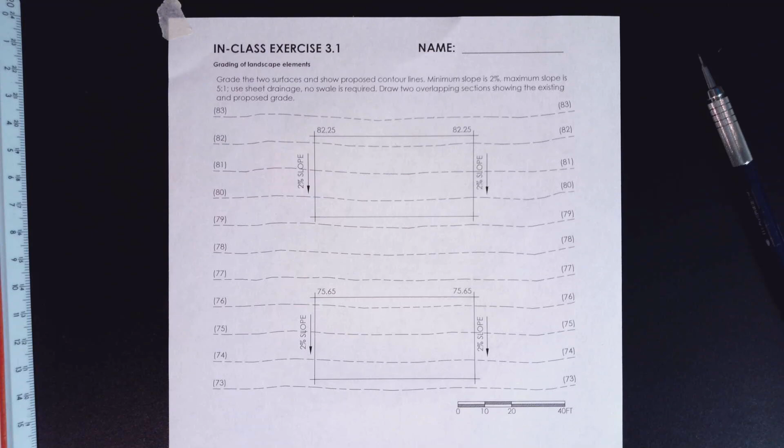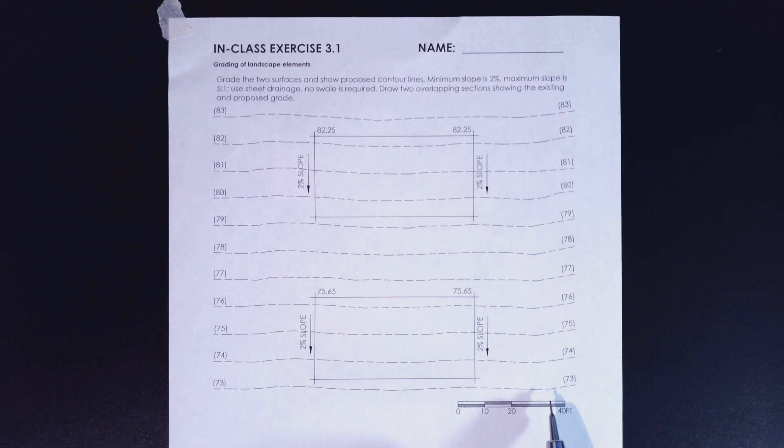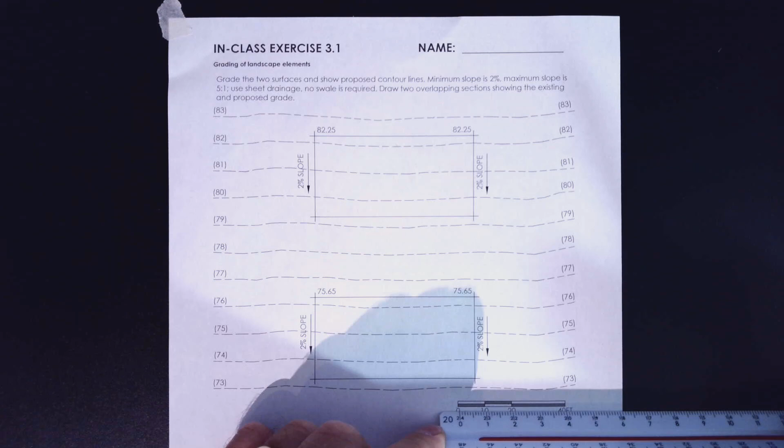This is in-class exercise 3.1. We're going to grade this. Your parameters here, it's 20 scale. So that means this is 1 inch from there to there. If you lay your scale on there, you can see the 1 is 10 feet, 2 is 20 feet, 30 feet, and 40 feet. So each one of these small ticks on your 20 scale represents a foot.

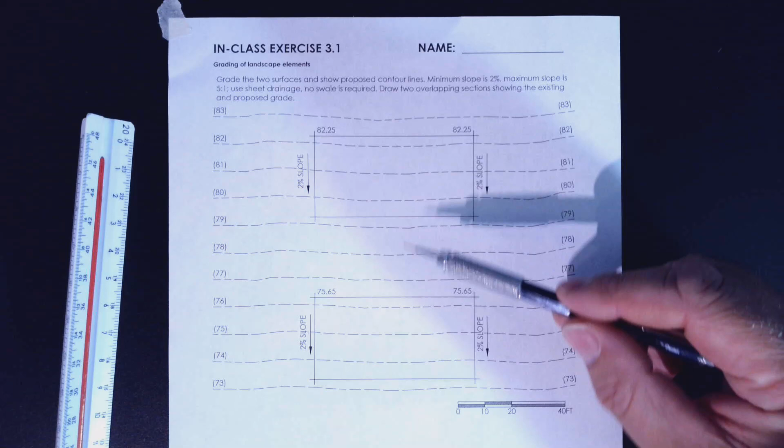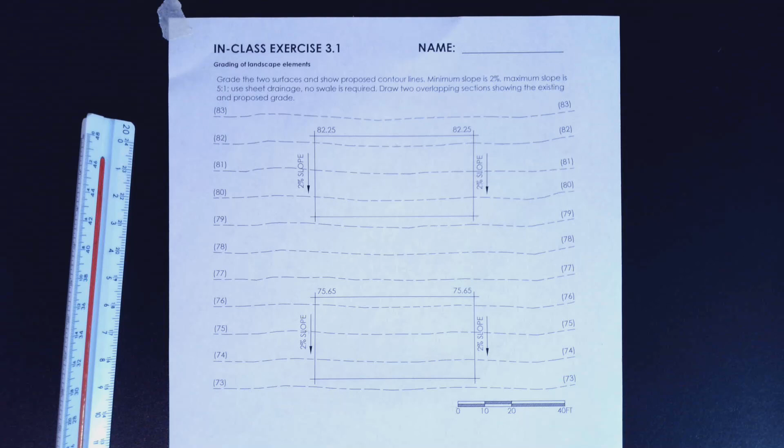The slopes for the pad are 2%, and the slopes for the contours in between, the spacing 5:1 max, which is 20% slope, right? Because 5:1, 1 divided by 5 equals 20%, or 0.2. Either way you look at it. So to get started, first thing we have to do is locate our corners on these pads, and they've given us the top of each pad. So this one is 82.25 at the top, sloping down at 2%.

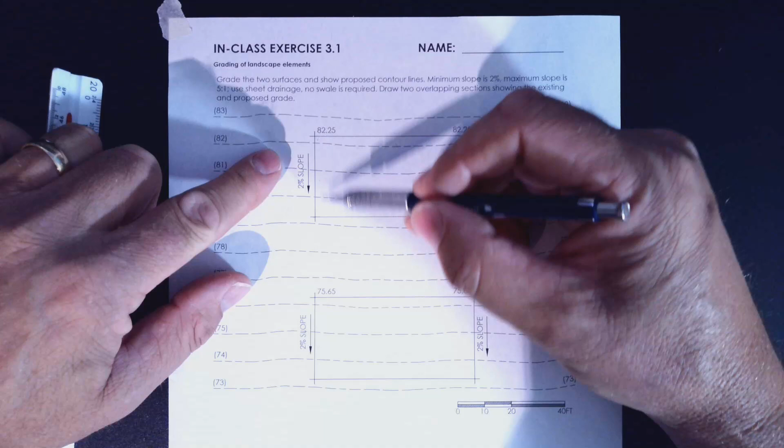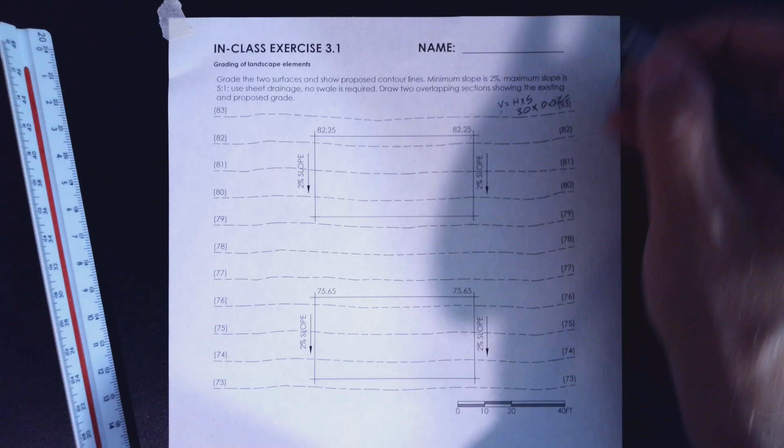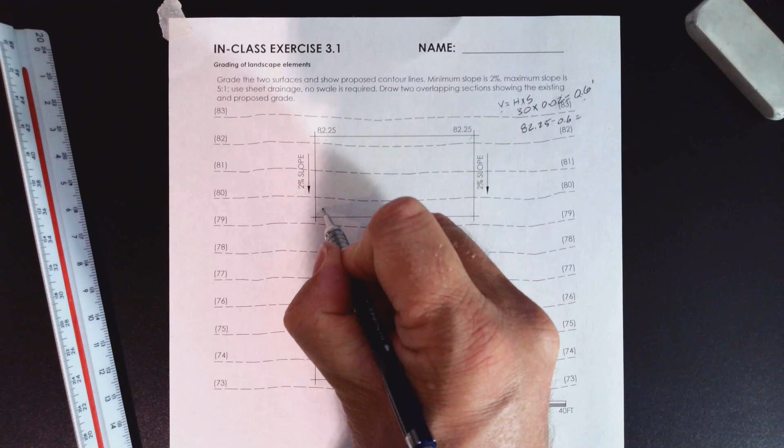If you scale it off, we see that this pad is 30 feet. So we don't know what the vertical is, and we know that vertical equals horizontal times slope, right? Horizontal, we just said it's 30 feet from there to there. So 30 feet times 2%, which is 0.02, equals 0.6 feet. So from here to here it drops 0.6 feet, so we subtract 0.6 from 82.25. 82.25 minus 0.6 equals 81.65. So your corners on this pad are 81.65 and 81.65.

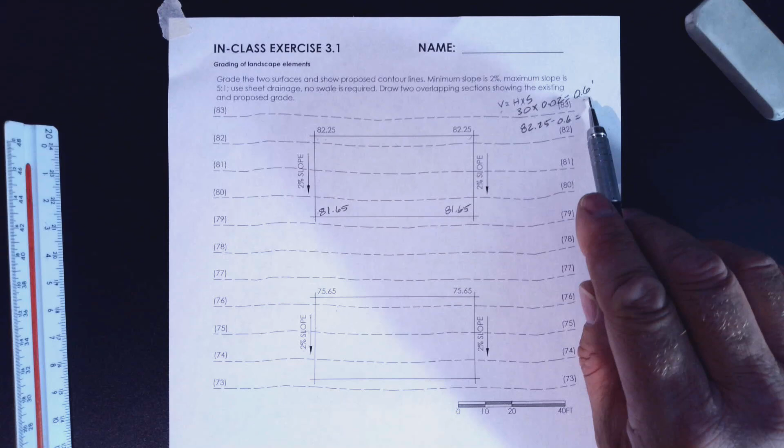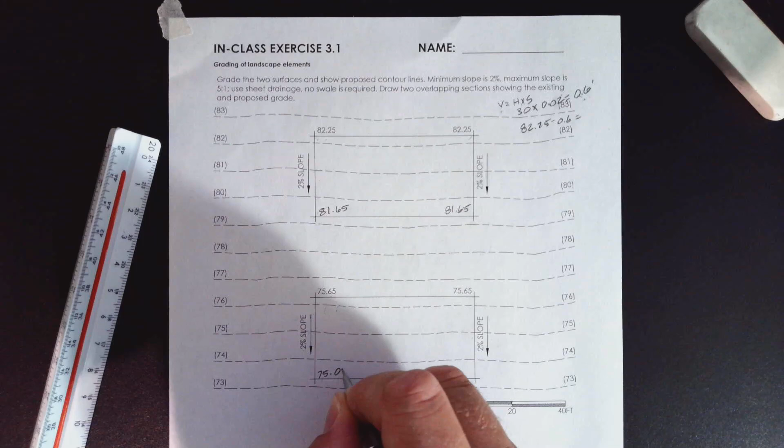All right. Now we got to do the same thing down here. This pad it's 30 feet as well, and at 2%, so you know that it's going to be the same. 30 feet times 2% is 0.6, so it's going to drop 0.6 from here down to here. So they make that easy. So subtract 0.6 from 75.65, and you get 75.05. Okay, so now we've graded out the corners. We know what the elevations of the pads are. So now we've got to do the contours in between the pads as well as on the pad. So let's start at the top and just work our way down.

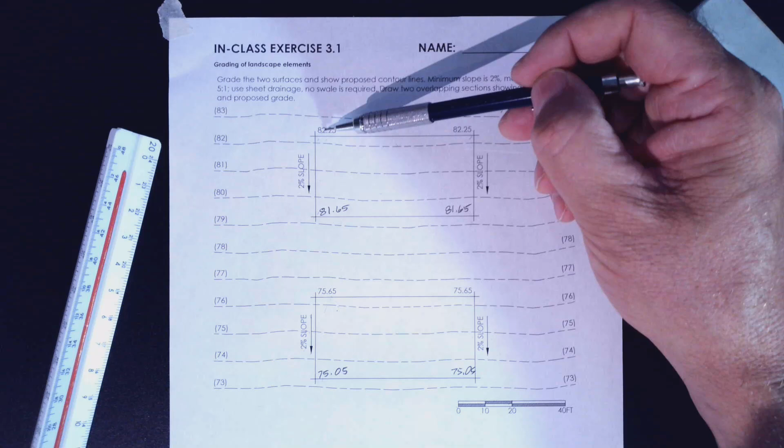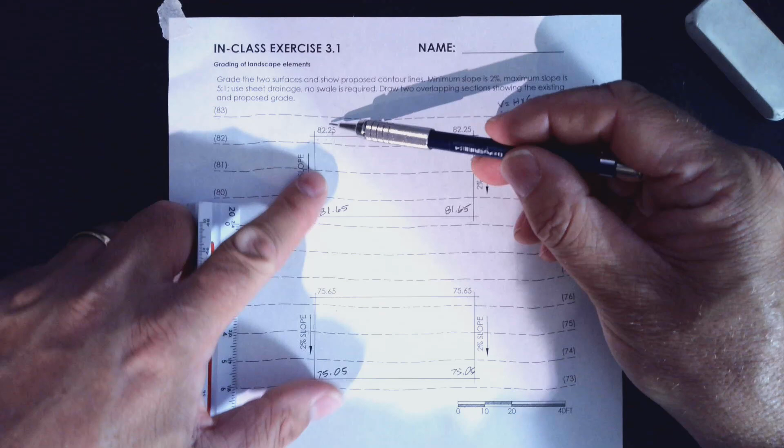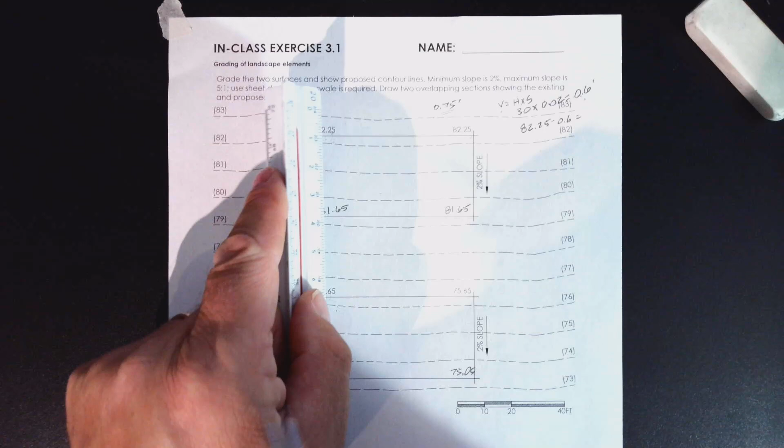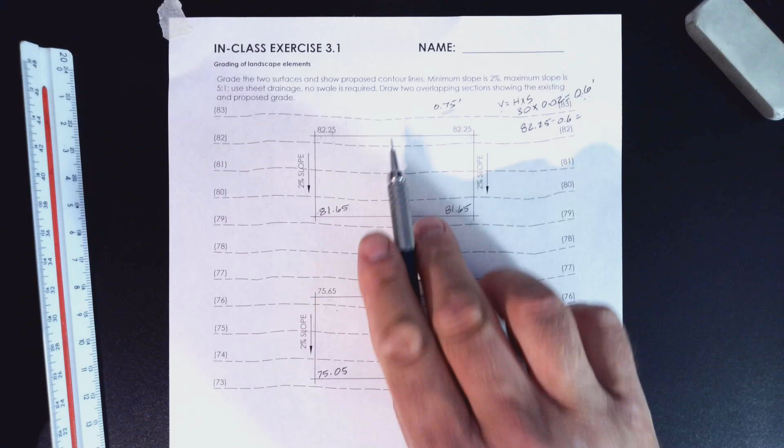So this is 82.25, and it's going uphill, right? 83, 82, 81. It's going downhill this way. Downhill, these arrows point downhill. 82.25, we've got to go to contour 83. So 83 feet minus 82.25 is 0.75 feet, right? So 83 is 0.75 feet away from 82.25 vertically. Well, this is less than a foot, but your separation is 5:1. Contour 83 is almost 6 feet away, so it's already at least 5 feet away. So we don't have to do anything. We're already meeting grade there, so that contour is fine because it's more than 5 feet away.

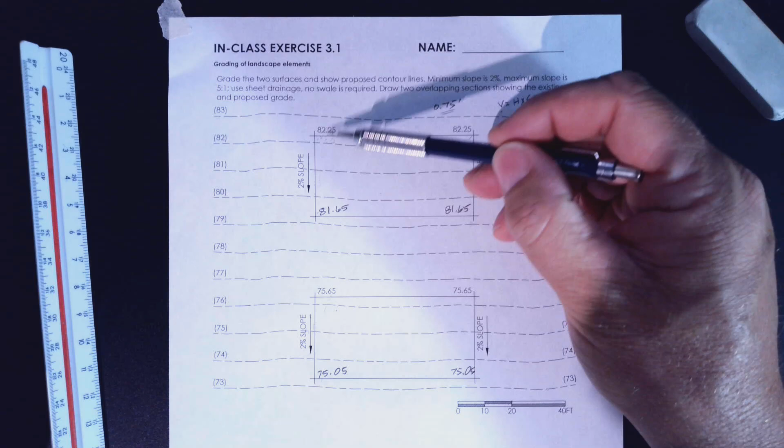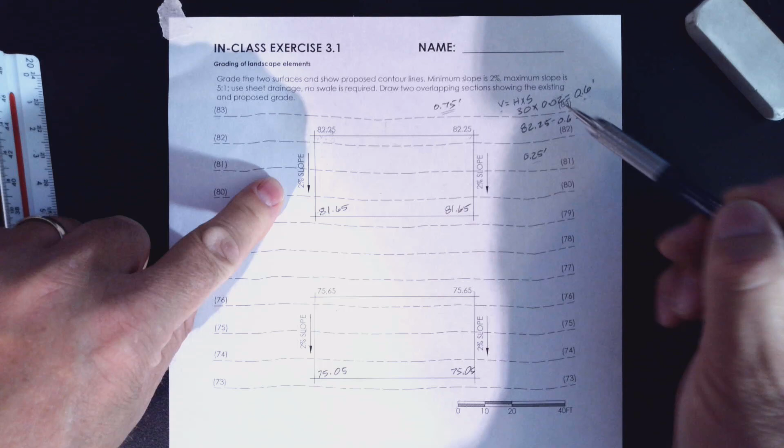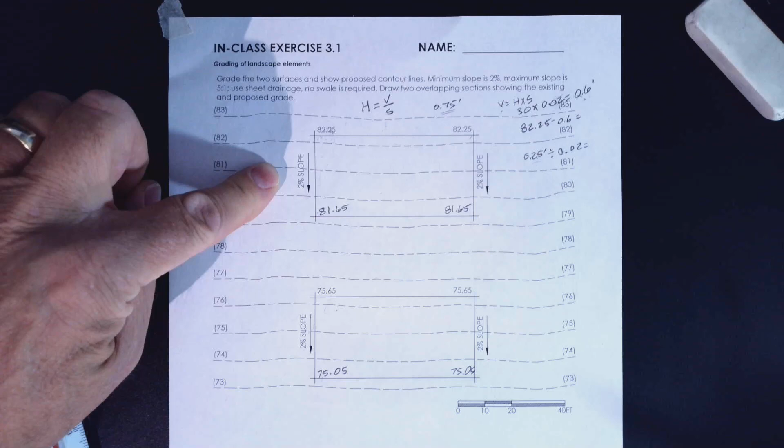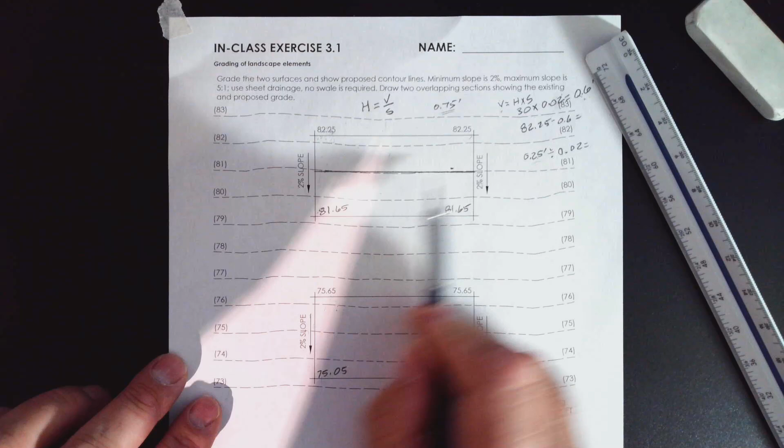Now we got to locate going this way, contour 82 or 81, right? That's the next contour down. Sorry, 82 is the next contour down. 82.25, we got to drop to contour 82. Contour 82 is 0.25 feet away vertically, right? If we subtract 0.25 from that, we get 82. We don't know horizontally where it is, but we know the slope. Horizontal equals vertical divided by slope, right? So if vertical is 0.25 and we divide that by the slope, 0.02, because that's the same as 2%, we get 0.25 divided by 0.02, 12.5 feet. So we just measure off of this line 12.5 feet and do it over here just so you can draw a straight line, 12.5 feet. And it should be horizontal to this line because it's a flat pad, so your intent is to make that horizontal. This line, this line, this line should all be parallel. So this is contour 82.

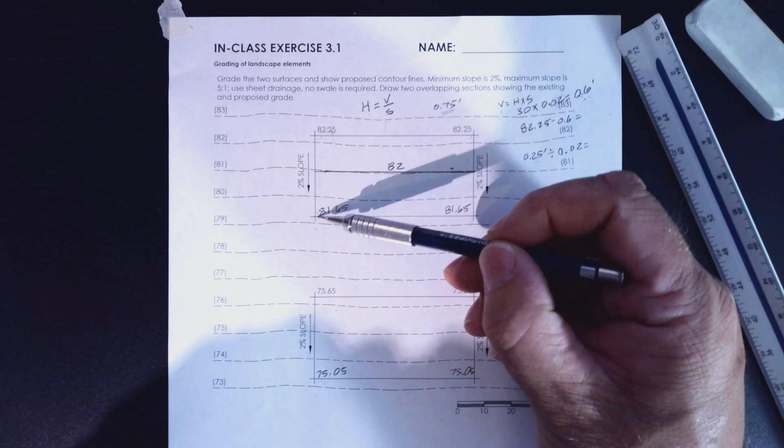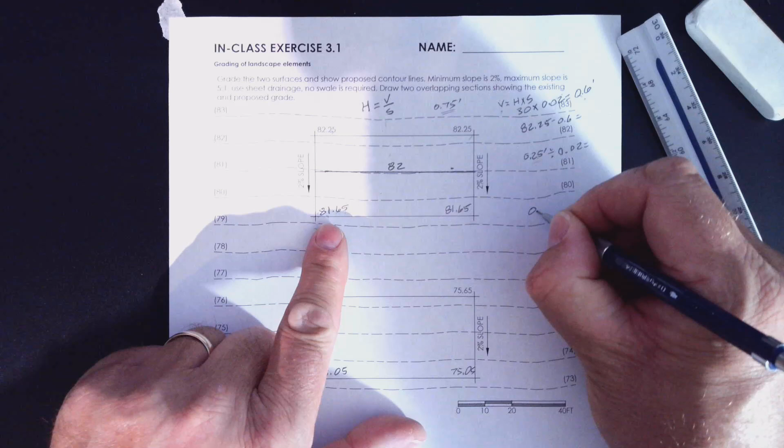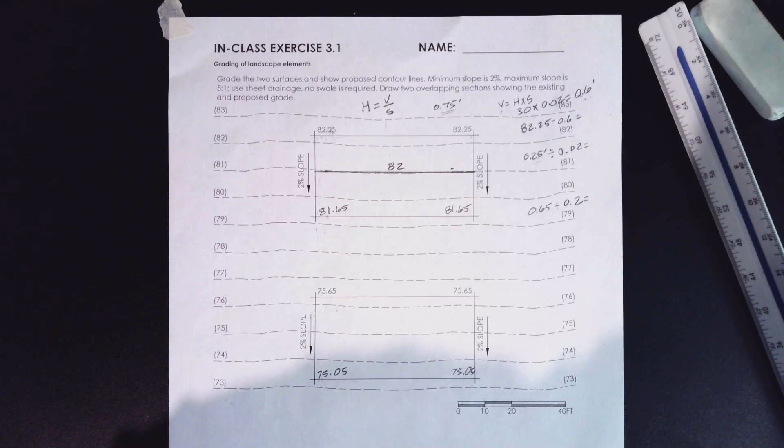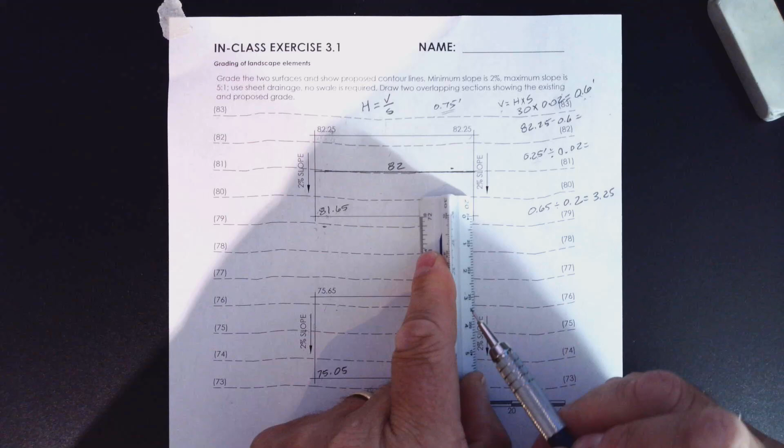Alright? Now, this is 81.65, so 81 is not on this pad anymore. Right? It's 0.65 feet vertically away. So we don't know how far horizontally it is away because if it was a foot, we'd need to drop 5 feet away. But this is 0.65. Right? 81.65 minus 0.65 gives you 81. So our vertical is 0.65 feet. We don't know the horizontal. Do we know the slope? 5 to 1, it's a 20% slope, right? So horizontal equals 0.65 divided by 0.2, which is 3.25 feet. So this 81-foot contour is going to be 3.25 feet away from the edge of the pad. And that maintains that 5 to 1. So we'll go 3.25 roughly in there, and 3.25 roughly in there.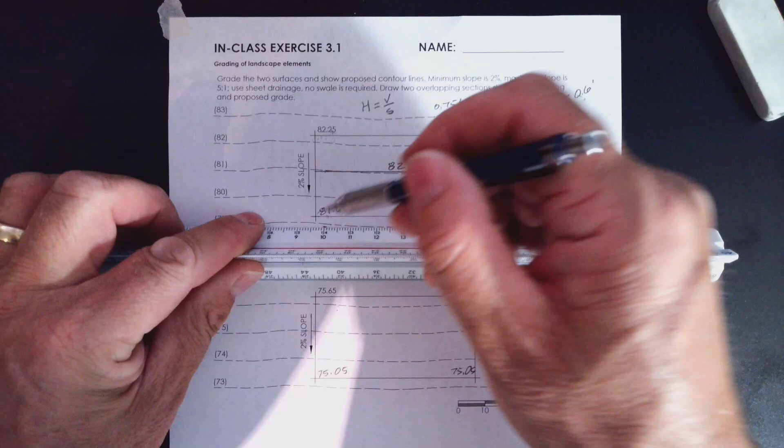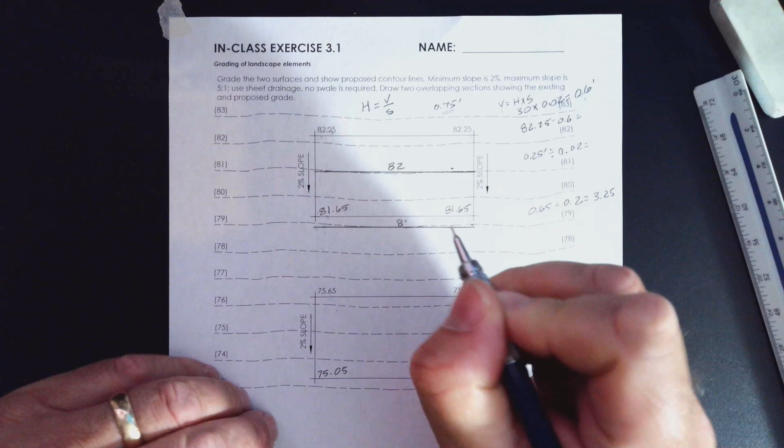And draw your horizontal line and use your straight edge. I've said this before, it gives a much more professional look if you don't just draw it by freehand. So this is contour 81. Oops. Contour 81. Hopefully these shadows aren't too bad.

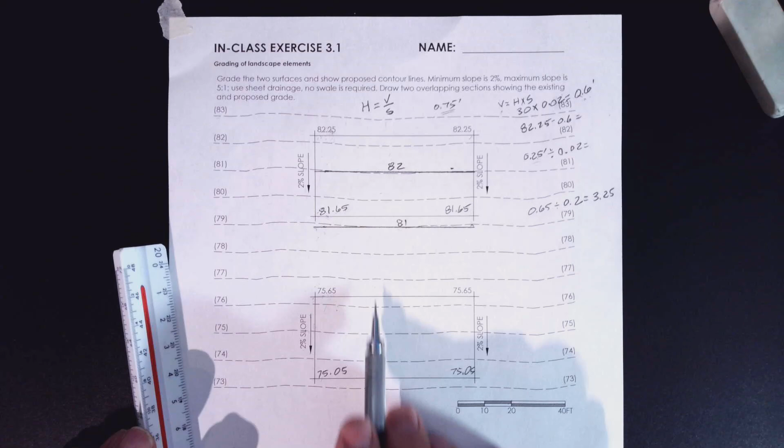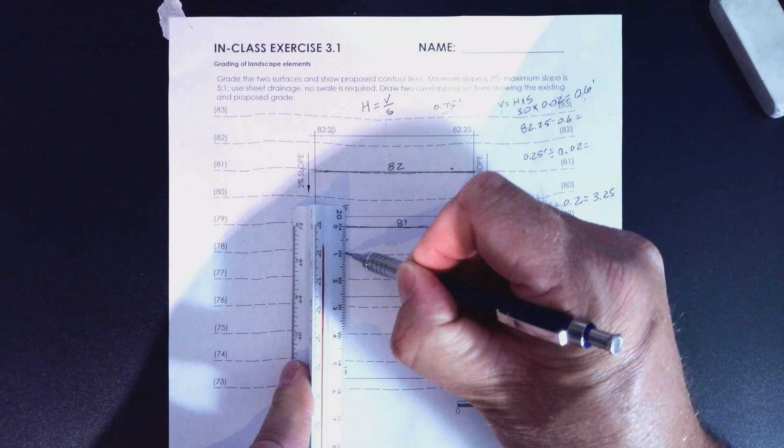Okay, now if this is 81, we got to get down to 76, right? Because this is 75.65. So 76 is the next contour up above here, right? So we got to get 81 down to 76, and then 75 will be on the pad somewhere. So 81 down to 76, they're 5 feet apart, so you just go 5, 10, 15, 20, that's 80, so this will be 80, 79, 78, 77, and then 76. Did I do that right?

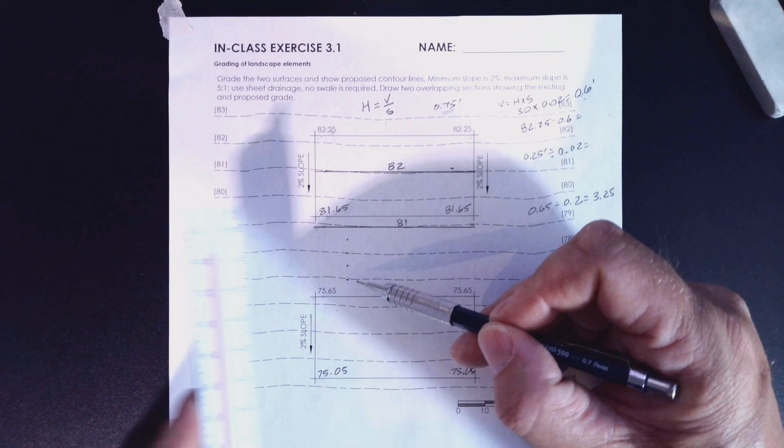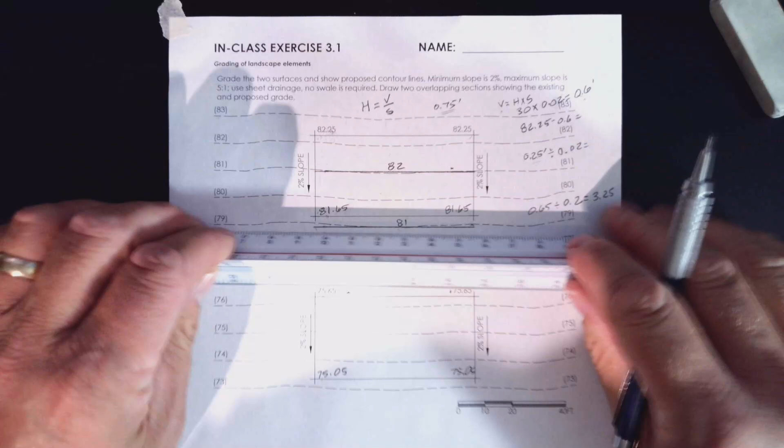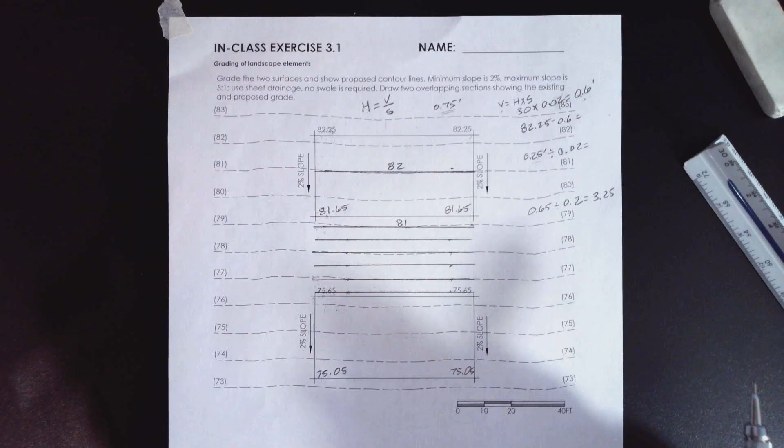It's 81, 5, 5, 5, 5, another 5. This is slightly less then, so this is 5, it's about there. So it's close. And we'll do it from here, 5 feet, 5 feet, just put my marks. So then draw your lines. And all I'm doing is drawing them 5 feet apart because that's the requirement that we've been given. So like that. So one more like that.

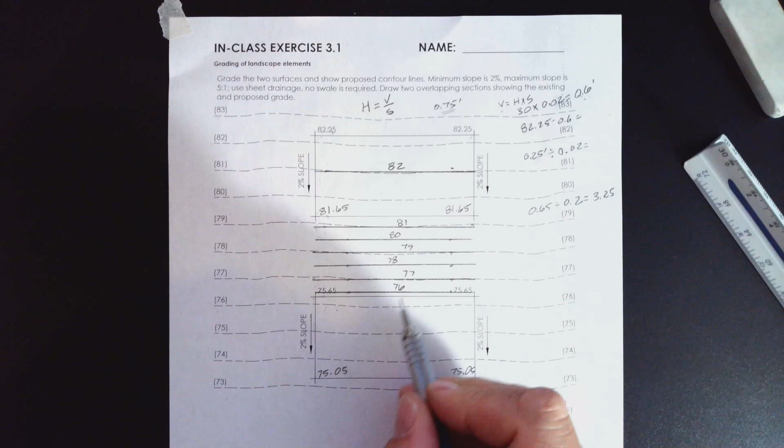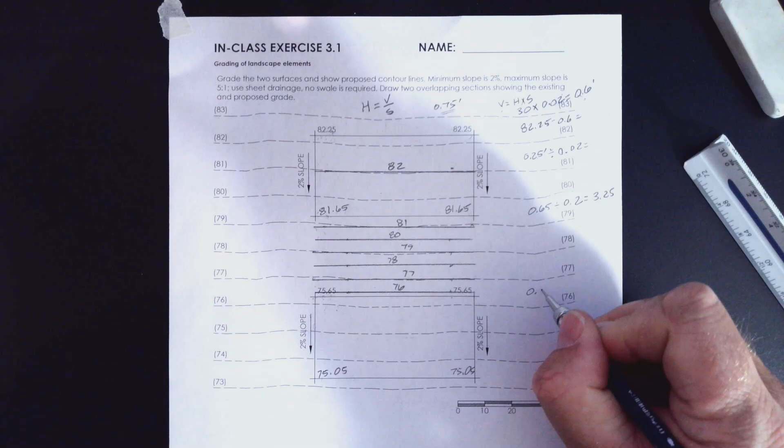Okay. And then this is 80, 79, 78, 77, 76, and then we said 75 is going to be back on the pad, right? Because this corner right here is 75.65. So we've got to drop vertically, we've got to subtract 0.65 from that 75.65-foot elevation to get to our 75-foot contour. So we know vertical is 0.65, and you got to divide it by the slope, which is 2% slope. 0.02, not 20% slope, because we're back on the pad, right? And we got to have a flat pad. So 0.65 divided by 0.02 was 32.5 feet.

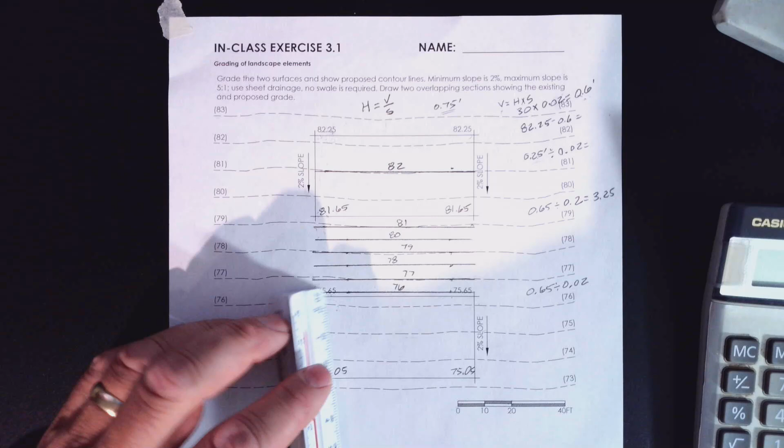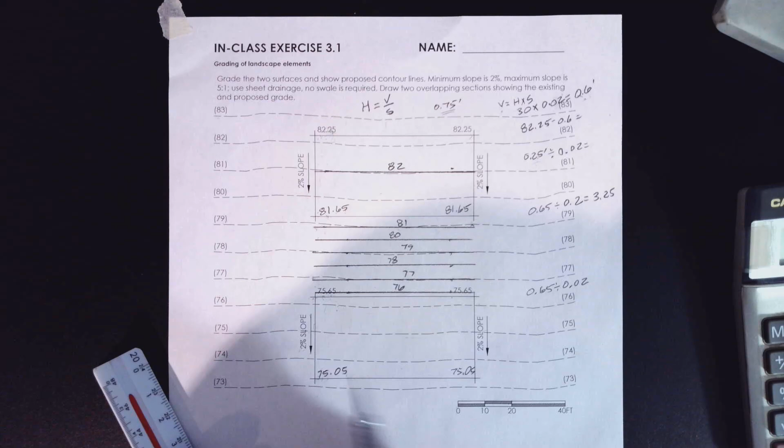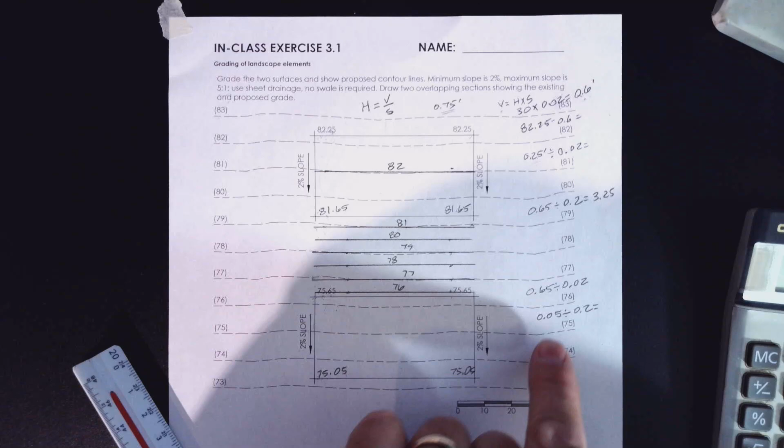So that can't be right. It is 32.5 feet. Oh, 75 is actually just off the pad. So see, it is. So pad 76, 75, down to 75. So it is off the pad. So it's almost on this line exactly. So it's 0.05. So let's just, for fun, we'll just go 0.05 and then divided by 0.2. Remember, it's 20% because we're off the pad now, so we're using this 5 to 1, which 1 divided by 5 is 0.2. So if we do this, 0.05 divided by 0.2 equals 0.25. 0.25 feet. So a quarter of a foot.

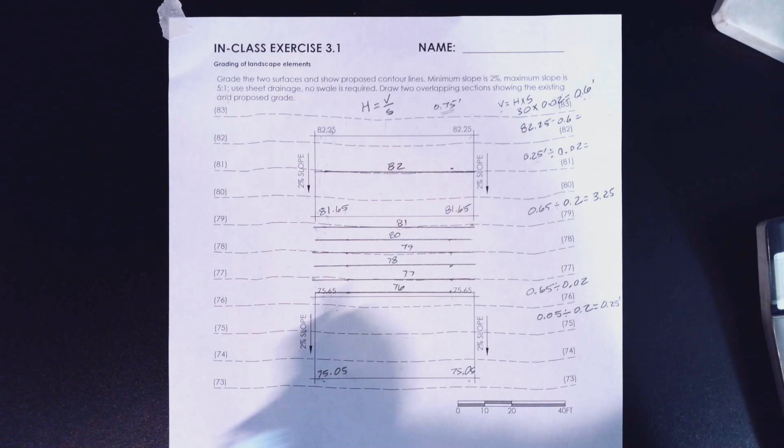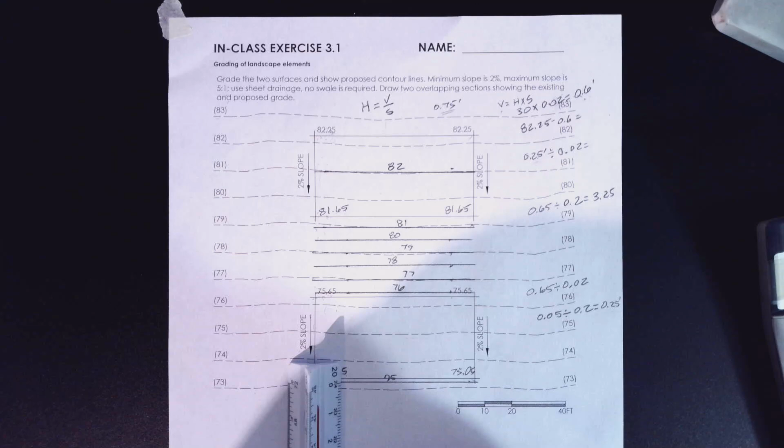So it is so close you can't hardly tell. Let's just draw it a foot off. Because if you draw it further than that, 0.25, you're still fine, right? Because it's a maximum of 5 to 1. So we'll just draw something like that. So that is contour 75. And then now we got to go 75, and look, this is 73 right here. 75 is way up here, so we got to go 74, 73. We got to add 2 more contours, and they got to be 5 feet apart because they're 1 foot contours. So there's 74 and 73. Okay, so now we've got all our contours.

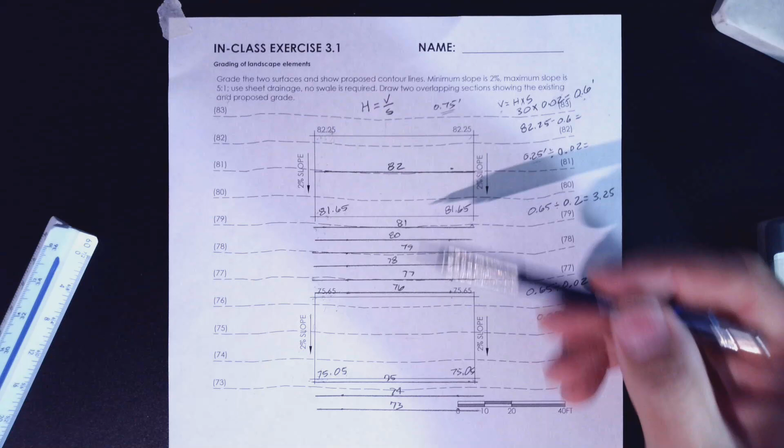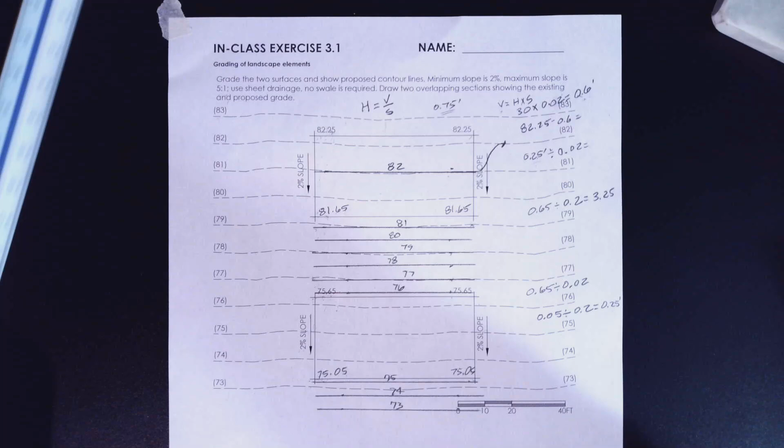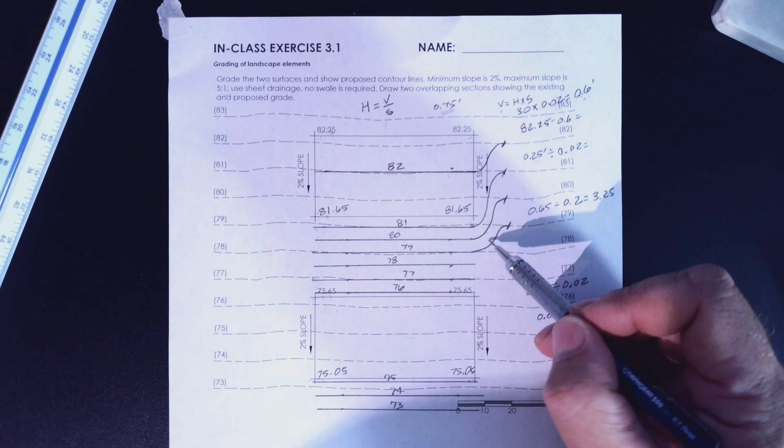All we've got to do is tie them back into the existing contours. So we've got 82, and 82 is right up here, so we just have to kind of swoop up. And we're just trying to make nice, soft curves. You don't want to just come at a straight line, jagged, because that would look very harsh. So we're trying to make smooth transitions with contours. So 80, this is 81, 81's clear up there. So you got to come around, something like that. 80 goes to here, like that. And as long as you're keeping 5 feet apart, that's the requirement. You know, so that's 5 to 1 max. Could be 6 to 1, 7 to 1, but the closer you get to 5 to 1, the less grading, less cost.

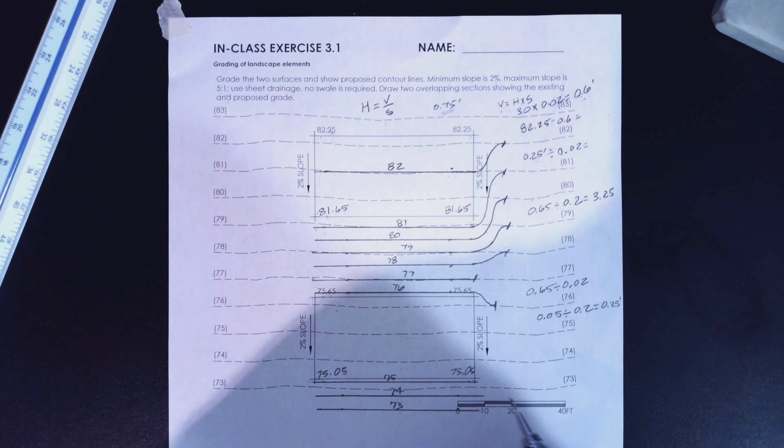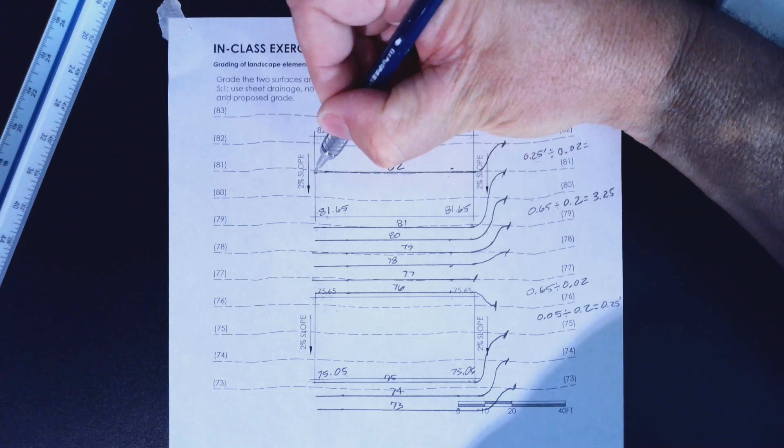So 78 goes right here, and then 77. Look, 77, we're on it, and then 76 has to come around like this, and then 75 has to come around and up. So you can do something like this, and this has to come around like this. The 73 has to tie back into 73. All right, and then we got to do the same thing over here. So I'll try to do this so my arm doesn't hide it. 82 has to tie back into 82. 81 has to go around the pad, tie into 81.

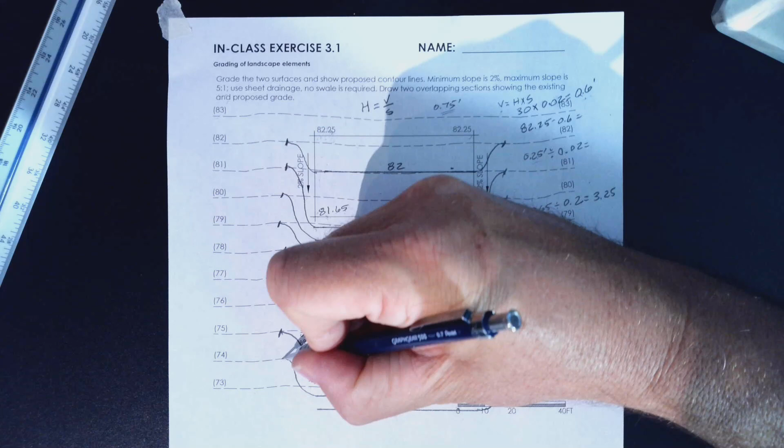80, 79, 78, 77, 76 has to tie back into 76, and then 75 has to go around and back up. 74. Again, maintaining that 5-to-1 separation there, like that. So there's your, we just graded out those pads.

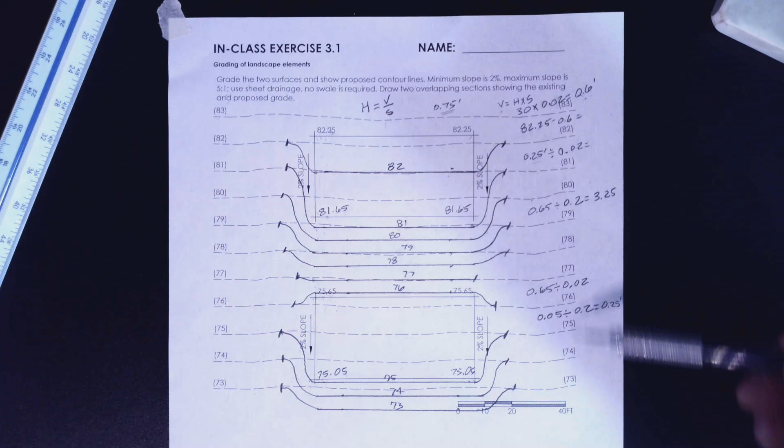What I'm looking for is essentially the level of cleanliness I'm wanting to see. I want to see some of your calculations on the side, so I know that you understand where you're getting these numbers from, and then making your contours nice and clean, tying in where they hook into the existing contours. They're solid, they're proposed so they're solid, and then the contour labeling for the solid aren't in parentheses. Existing, dashed, parentheses, proposed, solid, and on top or uphill of the contour.